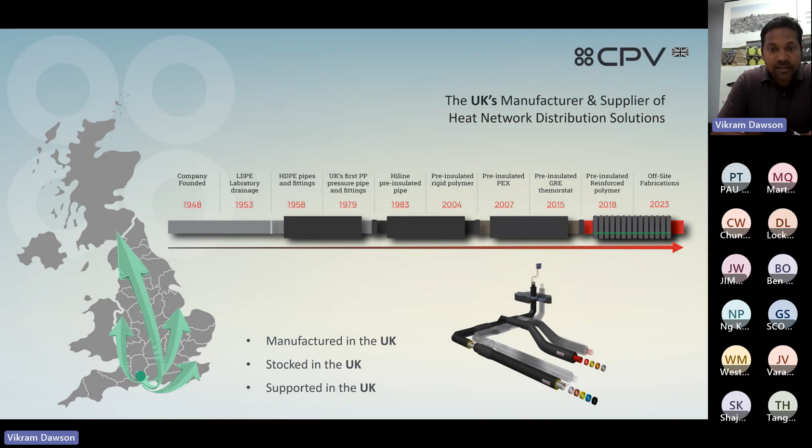So without pulling any further, I'm going to go into the heat networks and everything else. And as Josh said, any questions and answers can be either put in the chat or I can answer it at the end of the presentation.

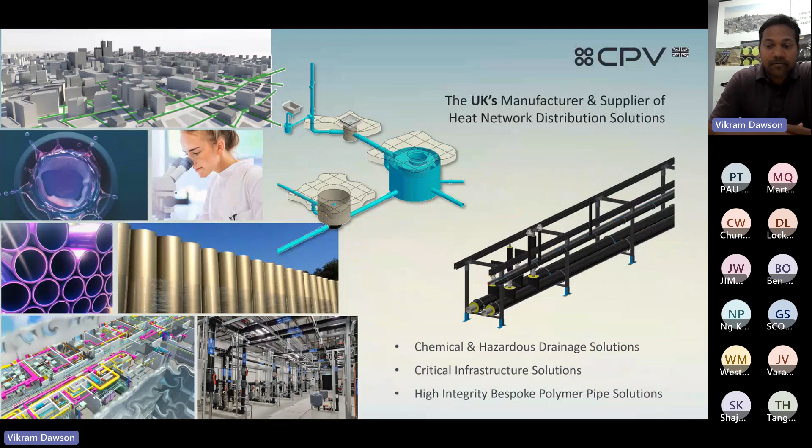As stated before, chemical and drainage applications were the main focus for CPV in the 50s, but that's moved on to critical infrastructure solutions and bespoke applications for various applications in the commercial and domestic industry. The focus of this CPD is predominantly on district heating concepts, distributions, and the design aspect, as well as the installation considerations.

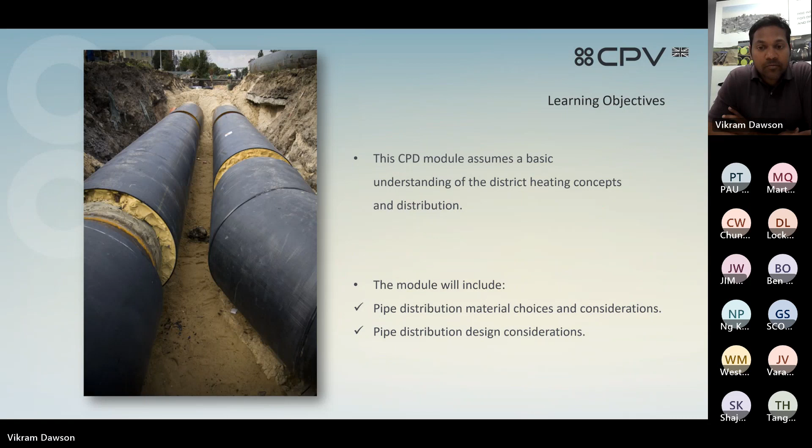So a district heating network - a lot of people on the CPD probably have knowledge or experience in this, but I'm just going to reiterate what actually constitutes these networks.

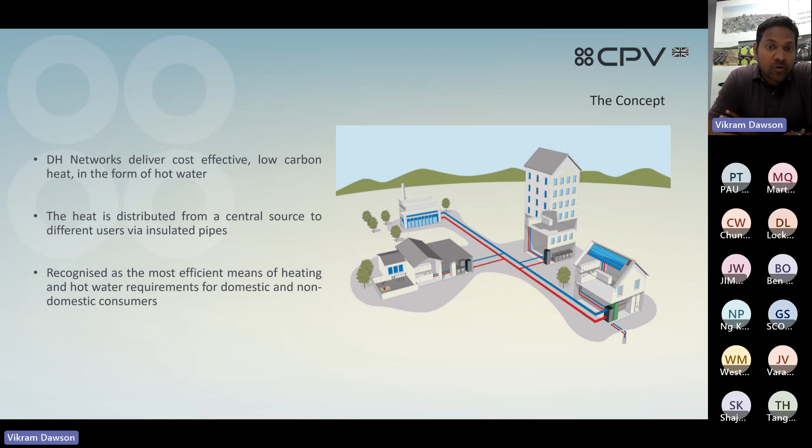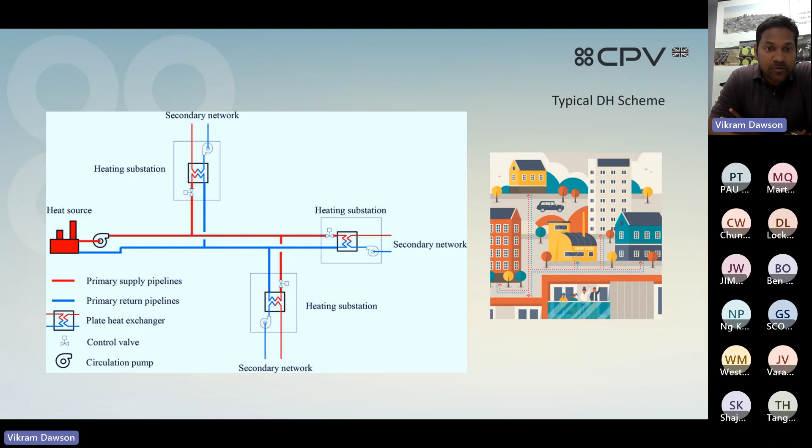So you primarily have the central energy center where the water is heated and distributed to feed either buildings, or it goes into a plate heat exchanger, which you would see. The central heat source distributes either into a secondary network or a heat distribution substation, where it can be either reheated and distributed, or it goes directly into your commercial buildings.

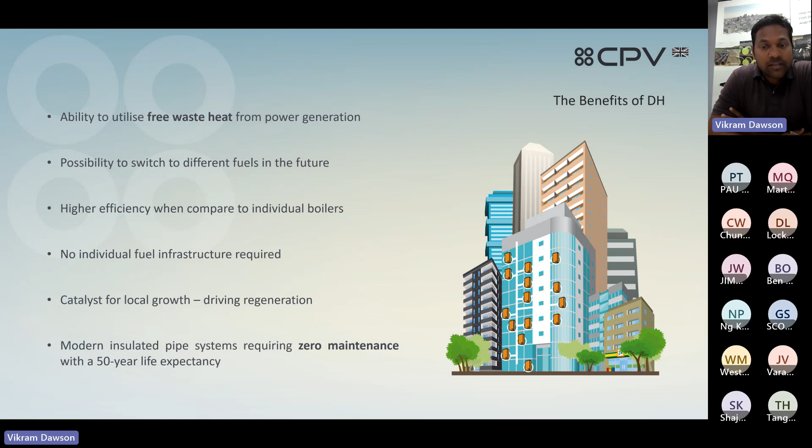The reason for these heat networks is predominantly bringing down your net carbon, as we are all focused on net zero carbon. There are a lot of waste heat recovery systems which are generated and can be used to heat the energy center. There could also be other alternatives, such as alternative fuels, and higher efficiencies using these larger heat networks. The catalyst of this entire growth is obviously driven by regeneration, with zero maintenance for a 50-year life cycle.

So what does it actually involve, and how is the water actually distributed in the network? Your primary focus is on your service pipe, your insulation, and the outer casing, where water is distributed through the service pipe, the insulation acts to reduce heat loss, and the outer casing protects the insulation as well as the service pipe. We'll look further at the other options in the market, the various insulations, the service pipe, and the outer casings in the slides to follow.

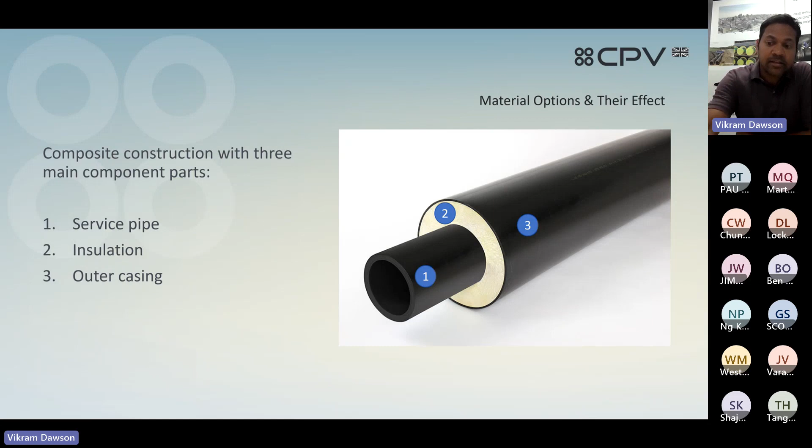To start off, major considerations need to be based on to select a system - that is, what service pipe you would select and what would actually suit your requirement would be dependent on your flow, temperatures, and pressures, your characteristics, your thermal stresses, and thereon spiraling onto the size range, the installation jointing, the maintenance, and everything else to go with that to make it a more sustainable system.

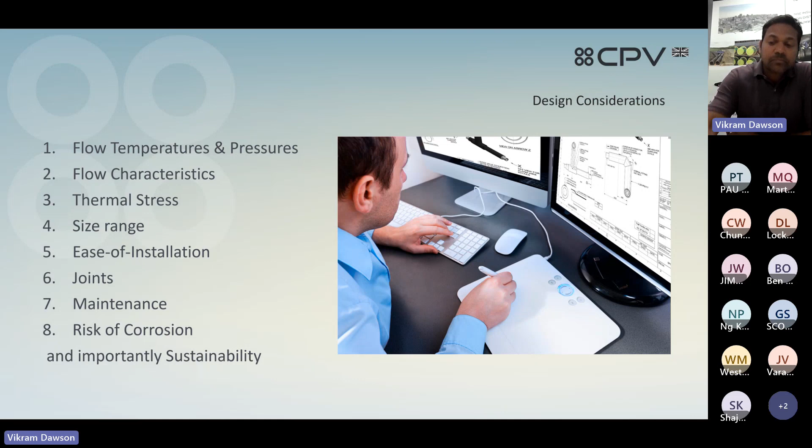Traditional systems generally have always been on the higher side of operating temperatures and pressures, and that is predominantly coming down with a lesser need to run at those temperatures and pressures. So before you start designing a system, the service pipe needs to be looked at, as well as all the necessary certifications for any materials that is a certified product to be used in the district heating market.

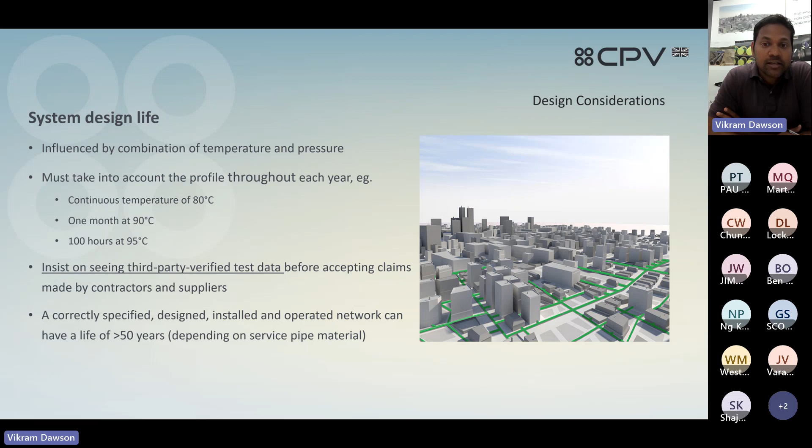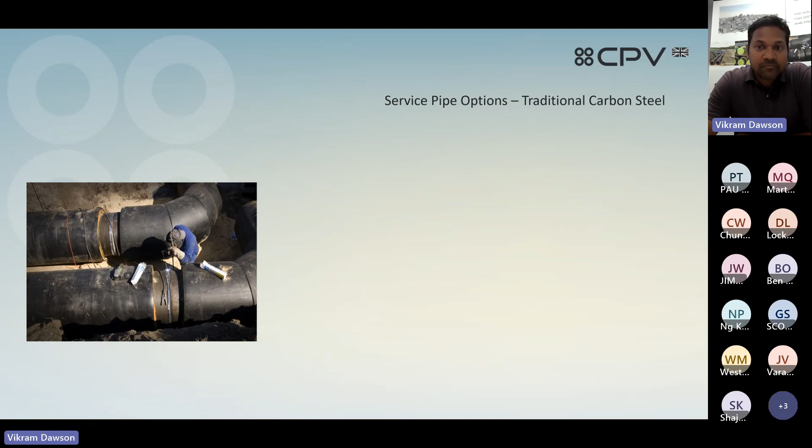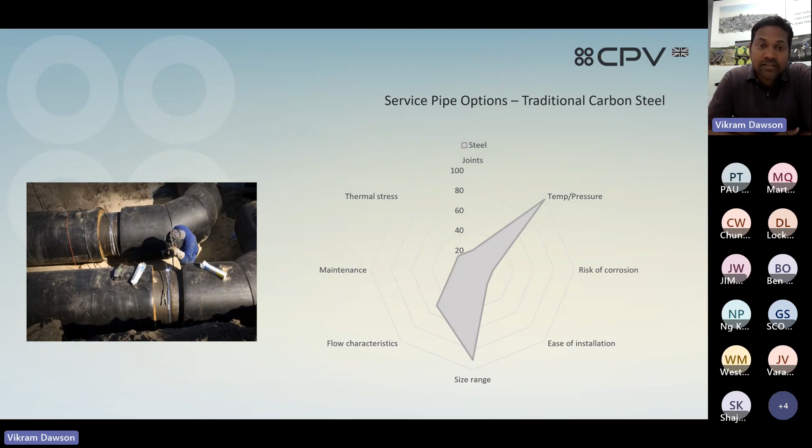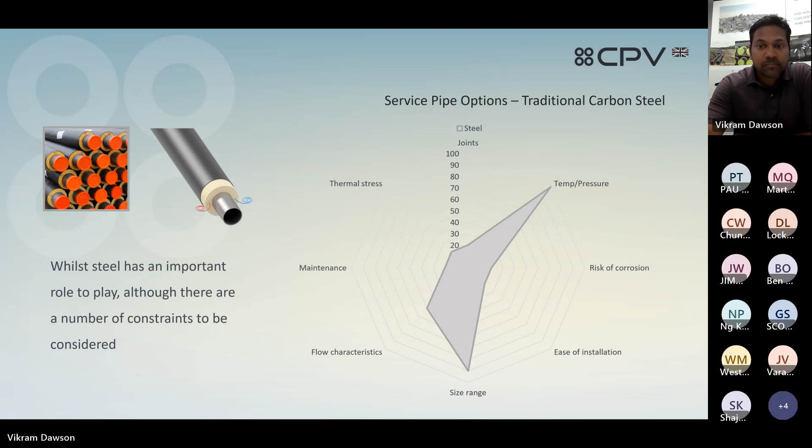So the traditional system has always worked well, but it does come with a few drawbacks when you consider other materials. These need to be taken into consideration when designing a system - selecting your material. A steel system, although it hits your temperatures and size ranges, if done properly, with all the considerations such as your thermal stresses, your joints, and the ease of installation...

...and the size range looked at properly, and the flow characteristics, you would have a really good system. But then the maintenance is also a lot, or it could be lesser, depending on how the system is installed. Steel is also prone to corrosion, so that needs to be factored in.

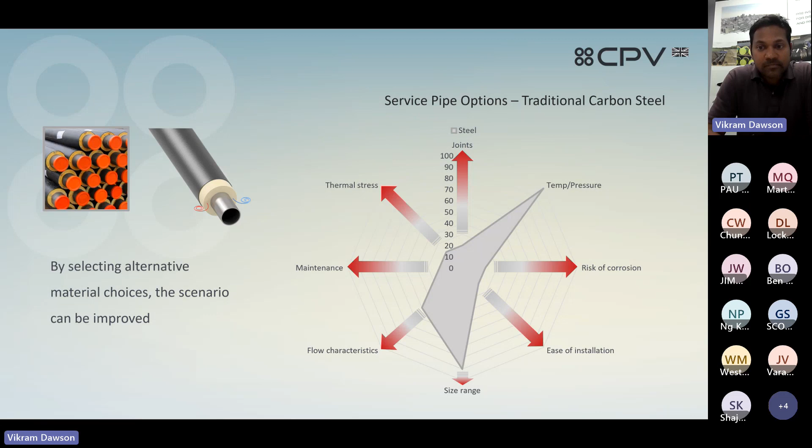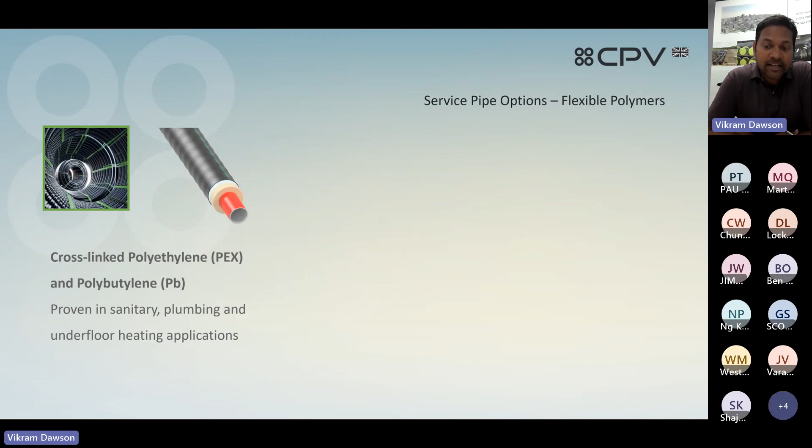And when you compare it to polymer systems, you will see the difference. There are many flexible polymer systems. PEX and polybutylene, to start off with, were used and proven in sanitary and plumbing applications for underfloor heating, and that spiraled on for use in district heating schemes, although operating under lesser temperature and pressure. Those will be on the smaller schemes, and there are a lot of advantages - obviously it cannot run at higher temperature and pressure.

So those are the constraints, which need to be considered for larger schemes. The size range it can meet is a constraint, because there will be sizes only up to 6-inch or 160 mil which polyprop or the PEX system can meet, and the polybutylene as well. The size range obviously has an impact on how big the scheme is.

The advantage with that, though, would be your thermal stresses, which are far lesser compared to a steel system where the forces are greater. You have a maintenance-free system - the corrosion issue, that's maintenance-free if the installation is done properly. Corrosion issue is not seen in plastic systems or flexible polymer systems. The flow characteristics are very good because the inner surface is very smooth.

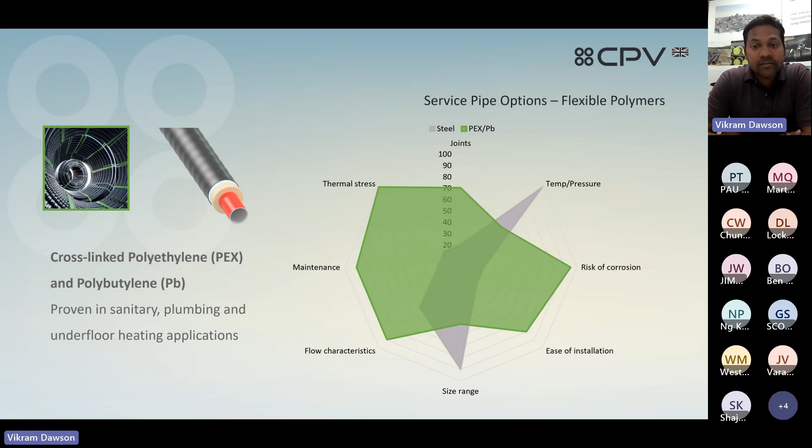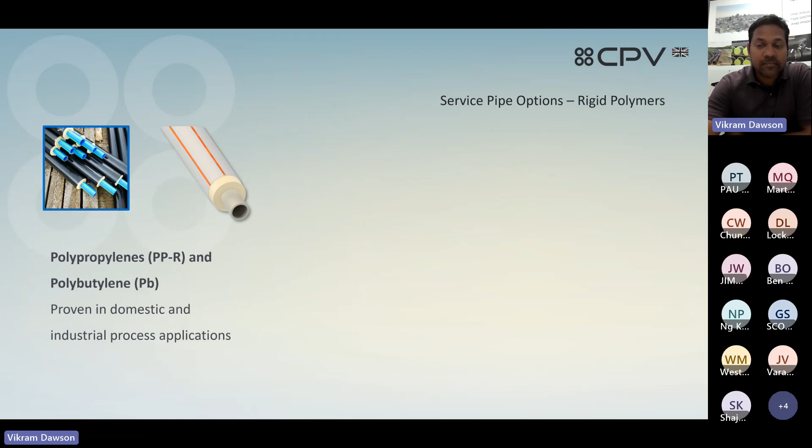That's moving on to our polyprop systems, which are rigid systems, which help with the ease of installation as well as the size range. But again, with polymers, you have a certain maximum temperature which you need to work to, which is not the same as steel systems. The rigid polymer systems, as opposed to steel, where you can see here, there's an overlay which hits all the marks - your jointing, temperature, pressure, risk of corrosion, flow characteristics, maintenance, ease of installation, size range. The rigid systems of polymers can meet all that.

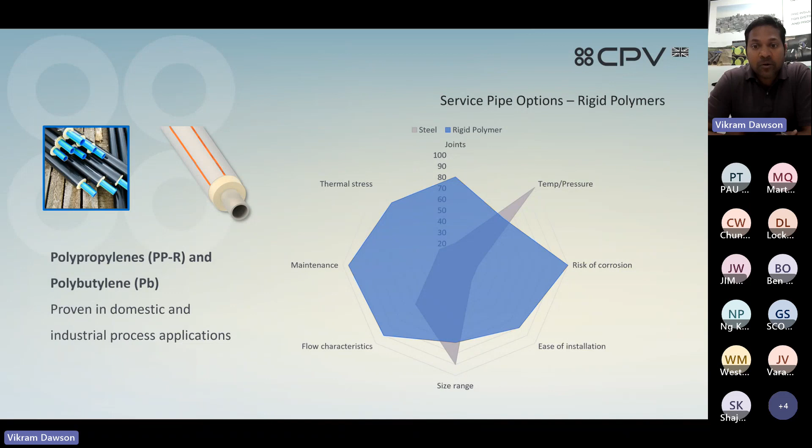And that's a typical example of a pipe in a trench with electrofusion jointing, which we're going to look at different jointing methods as well, which needs to be considered when you are working with different materials. The image there is a twin and a single system, which is transferable to traditional steel systems, as well as adopted in rigid polymer systems, as well as flexible polymer systems.

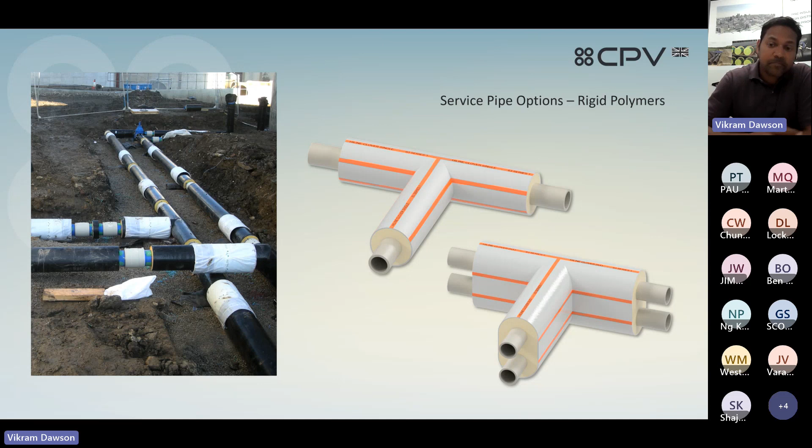GRE, we're going to touch a little on that because it's a product predominantly used in the petrochemical industry, but is also a good material selection for these district heating schemes, because they can meet the temperatures and pressures which are greater than polymer systems. Though it falls a little under steel, it predominantly hits most of the design aspects of steel, and that's a good material to select, given the money you're going to spend, or if the scheme needs it.

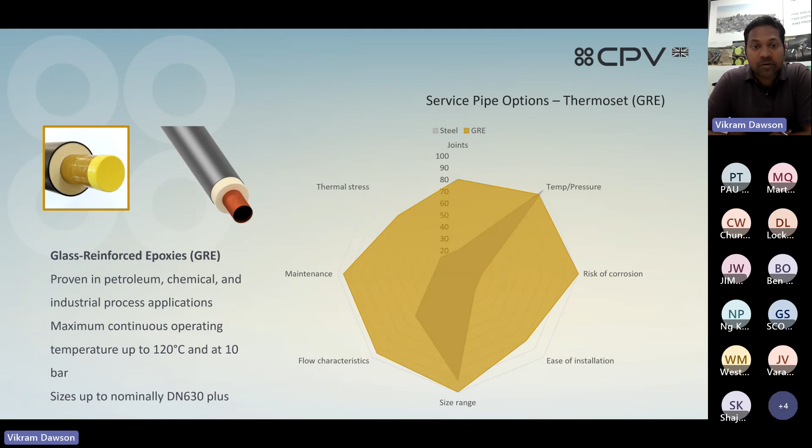So GRE is very similar. Again, we're overlaying it over a steel system, and as you can see, it hits the right marks even better than rigid polymer systems, because it can hit higher temperatures and pressures. The maintenance aspects are far lesser, with no corrosion, and the flow characteristics make it a very viable system for larger district heating schemes, as well as small ones. The jointing of GRE...

...is a little different to rigid polymer systems and steel systems. As you can see, there's a cross section of a joint where it's an adhesive joint upon a glue system, as well as a heating blanket which helps the glue to set.

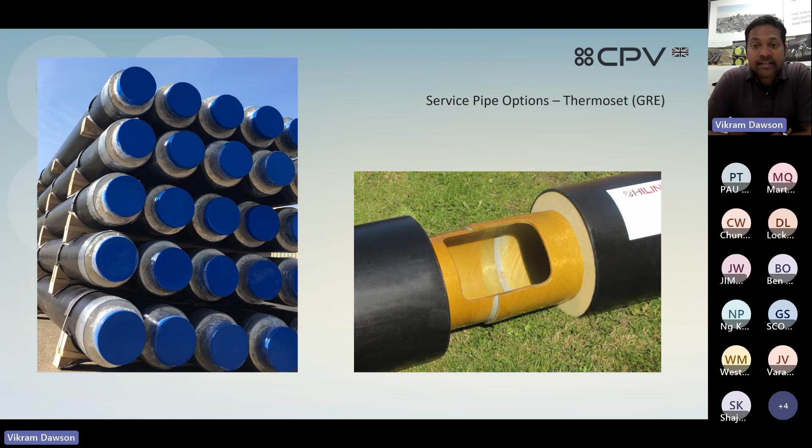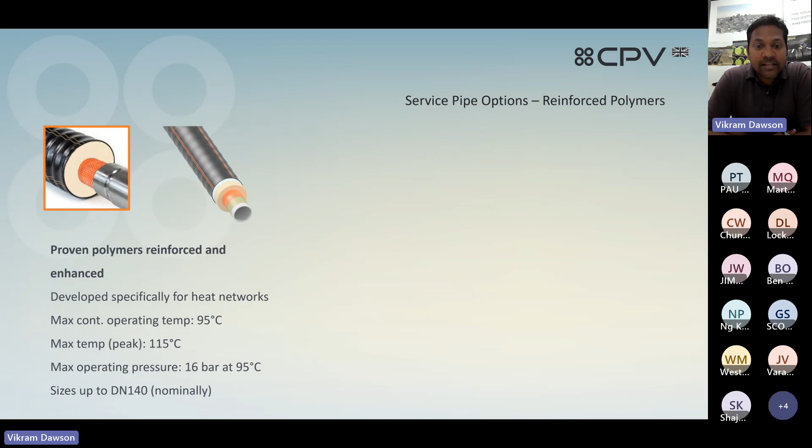Going into polymer systems, there are also options of reinforced polymer systems, which hit the higher maximum temperatures. So the flexible polymer system, which can run at a maximum operating of 80 degrees, is exceeded on these reinforced systems, where 115-degree maximum peaks and continuous 95 kind of set the bar for flexible systems, making your material selections good, with options running up to 6-inch on flexible systems, which is what you would see as the max.

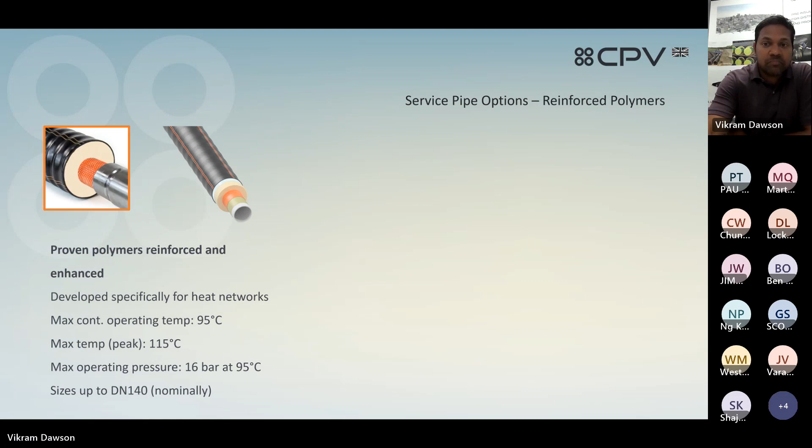And overlaying it against steel, it's far better than traditional flexible systems, which have PEX as the primary material. This is reinforced, hence it extends the size range, and it meets all the criteria of maintenance risk of corrosion characteristics, flow characteristics, and thermal considerations.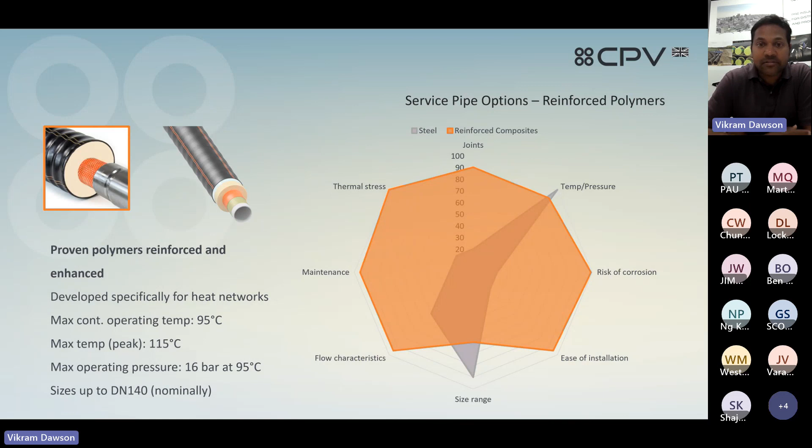The jointing is a pressed fitting. We're going to look at the fittings on a separate slide here. But as you can see, these systems, with the change in direction or the way it's laid in a trench, make it a far easier system to install on site. If a trench has a lot of services in it, these flexible systems work really well.

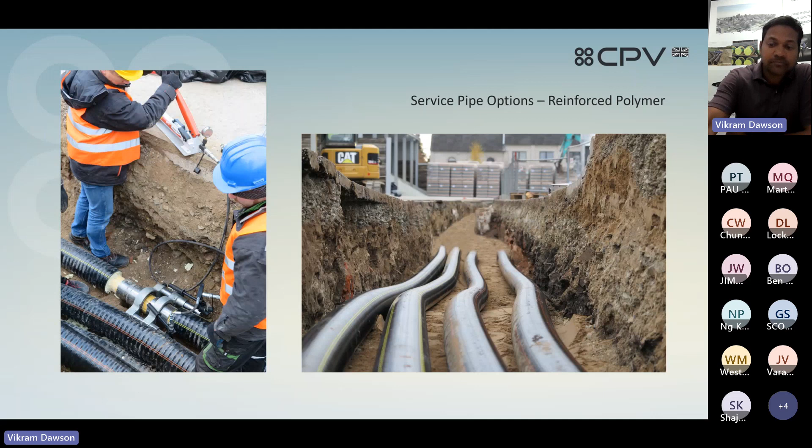Your joints. Okay, so as you can see, traditional systems, the steel system, is arc and gas welded. We've also touched base on the socket adhesive system of GRE. The polymer systems, the butt and electrofusion, are widely used above and below ground, and it's a proven jointing technology, as well as the mechanical press fit fittings used with reinforced polymer systems.

There are also mechanically bolted systems, which are seldom used, but can also be used below ground. But what you would see traditionally on rigid systems, that is polymer, would be butt and electrofusion, along with gas welding on steel. And the outer joint, there's a slide on your right, as you can see.

This is a new system where the electrofusion coupler is half welded or pre-welded and prepped prior to going to site, which makes installation on site far easier, where the need for clamps and peeling of the pipe is all taken out. And the outer joint, or the void where these joints are filled, is going to be looked at on the next slide.

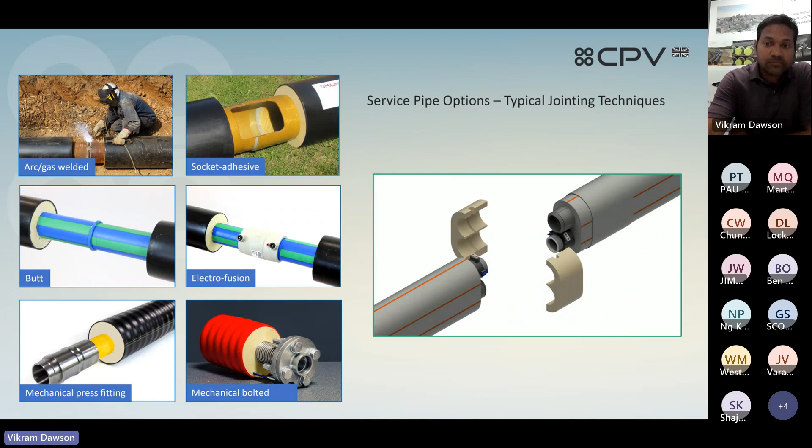So a graph or table where you can see the different jointing methodology of the various systems.

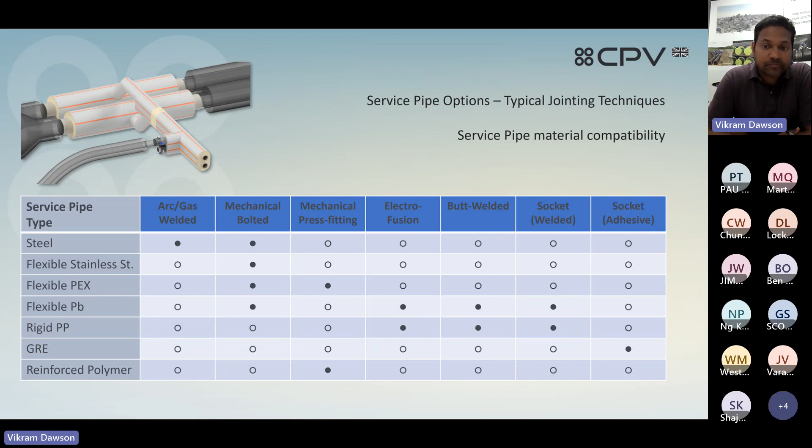So moving on, design considerations for these systems.

Bonded and non-bonded systems have a clear difference between them, which has a massive impact on heat loss, as we'll look at in a later slide. A bonded system creates a bond between the service pipe and the insulation, thereby minimizing heat loss, whereas a non-bonded system is a wraparound foam, which on the downside has a possible issue with expansion. On a bonded system, the service pipe, the foam, and the outer casing move in unison, as opposed to a non-bonded system.

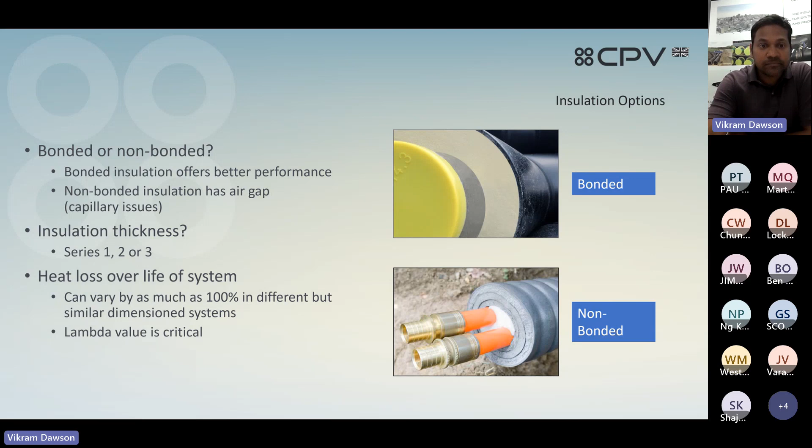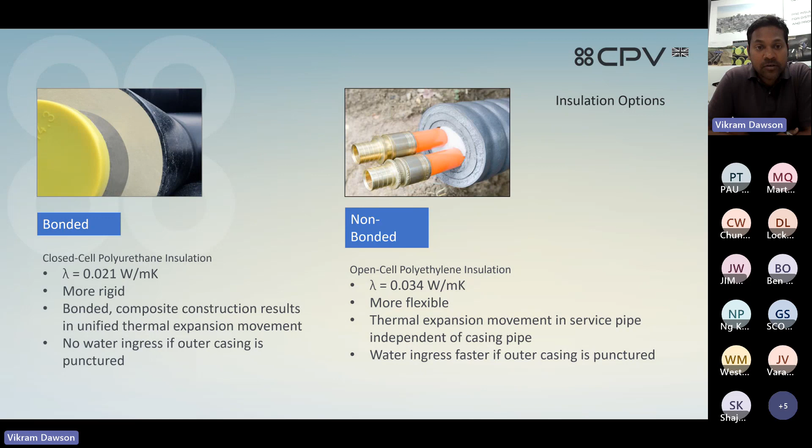The lambda value shown here, which impacts heat losses, is critical to both non-bonded and bonded systems. As you can see, the lambda value is far greater on a non-bonded system, making it either require multiple layers of insulation to meet requirements, making the trench bigger, as well as increasing cost. A bonded system has the massive benefit of no water ingress should the outer joint not be properly installed and a leak happens.

Here's a typical graph showing the heat loss between a bonded and a non-bonded system, a visible indication of why a bonded system needs to be used or selected.

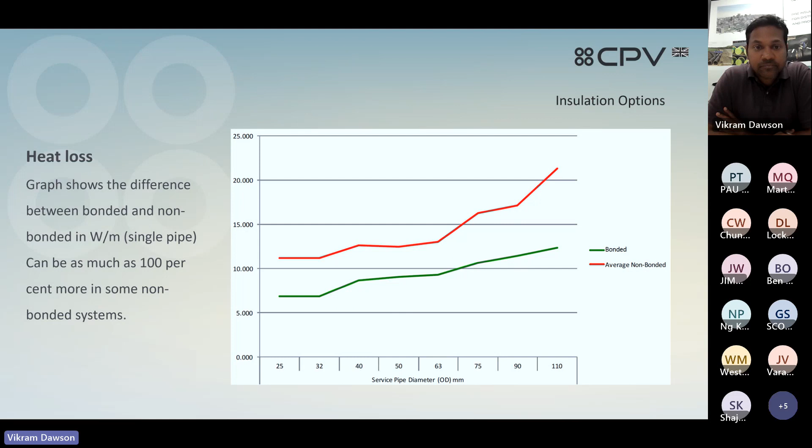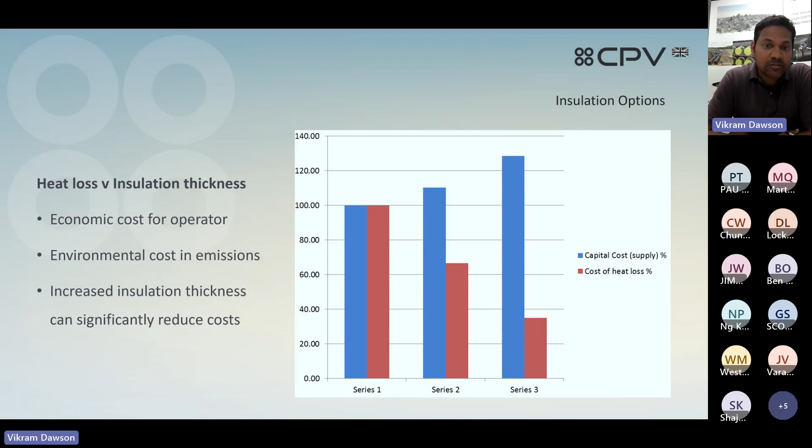There are different insulation thicknesses which impact your selection at the design stage, where cost is a massive factor, but over a period of time having greater insulation has a greater benefit. Series 1 is a traditional system with minimum insulation between the outer casing and the service pipe, which can be enhanced in Series 2 and 3. Greater insulation gives a lesser heat loss, making the system more cost effective over time and significantly decreasing the overall cost to the end user.

Aging from foam is something that has an impact on the system itself. Foam that ages decreases in performance, and there are multiple barriers which can be used to lessen or decrease the aging of the foam. This also needs to be considered, either having a thicker outer casing should a leak happen, or a barrier within the casing to decrease or prevent any leaks or gases escaping the system.

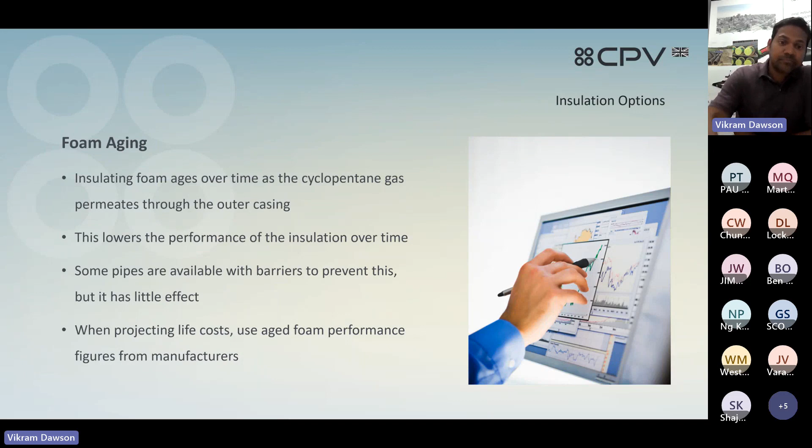Traditional systems have predominantly had, because of the issue with corrosion and leaks of the service pipe weld or any leaks in the system, a copper and tin wire or surveillance system which is compulsory on steel systems. This is not seen in polymer systems because the issue of corrosion or leaks is far lesser, but a leak detection system can also be incorporated or implemented in the system should a need arise.

These systems can either be used with leak detection systems or with a leak detection and a maintained trace heating system should a need arise. All it does is allow you to pinpoint a leak, or detect a leak, similar to any surveillance system used on steel, which can also be done on a plastic system.

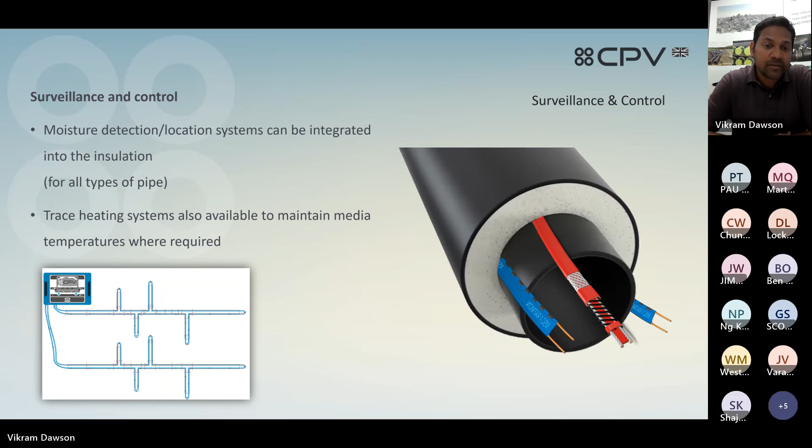This leak can be pinpointed to a close range of about 1 meter within the leak. We are not going to be looking into surveillance systems in depth, but just to give you an insight into what you need to consider should you be using a rigid or flexible polymer system, as opposed to a traditional system where a surveillance system is a must.

The outer casing of buried systems has always been either low density polyethylene or high density polyethylene. HDPE is used in traditional steel systems as well as polymer systems, and LDPE is used in flexible systems. There are also alternative materials in the market where you can use aluminium as the outer casing, steel casing, or a barrier for contaminated ground, or a thicker casing, spirally wound galvanized steel for above ground, as well as touching base on high modulus polymer systems, which is the next generation with a massive advantage in alternative materials that can be used.

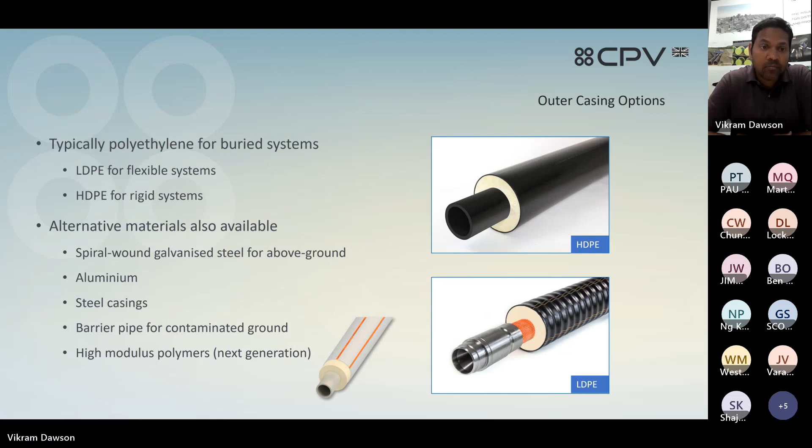The outer joint, which we spoke about a little earlier, the traditional systems would have been the heat shrinkable double seal joint, where it's a joint which is slid on prior to the service pipe connection being done, and then is slid back on and shrunk down, and either a two-part foam liquid or a half shell is used. The heat shrink joint has a mastic which creates the bond between the service pipe and the inner of the outer joint.

But you also have the clip-on systems where it can be retrofitted, where you would slide in a rubber ring prior to doing the service pipe connection, and a clip joint, that is the mechanical shown in the image, is a two-part clip which clicks together and foam is poured into the void. As you can see, it is far bulkier, making the trench possibly a little bigger.

So another design consideration: fusion joints are far more robust and are used extensively for below ground systems, as well as for contaminated ground. It's a good consideration to use these. There are slide-on electrofusion joints, and there are also the wrap around, which can be retrofitted, which helps with the process of when commissioning a system. These can be retrofitted, which is a massive advantage.

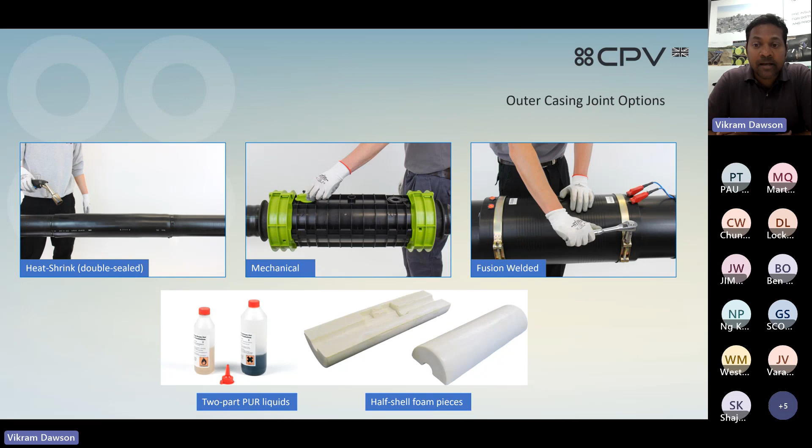So, operating temperature and pressures - this is something which dictates your design considerations. For larger heat networks, it's still steel running at higher temperatures, but as you can see, the GRE and the reinforced polymers sit right in between them, which are more so being used or being considered by designers for systems which are running at temperatures between 110 and 120 degrees. And smaller schemes, the PEX and the PB are used.

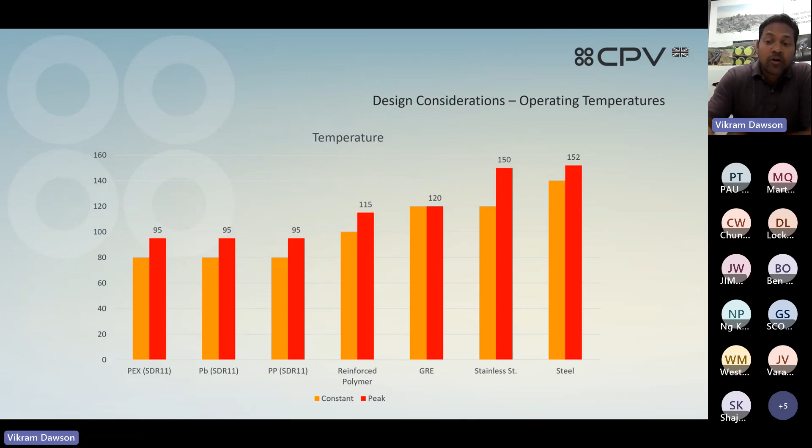And going on to that, into our next slide, which is the pressure considerations. Obviously, steel can run up to 25 bar, and all other systems are running at a maximum of anything ranging between 6 and 15 to 16 bar. So if you're looking at high pressure systems, steel is your go-to material.

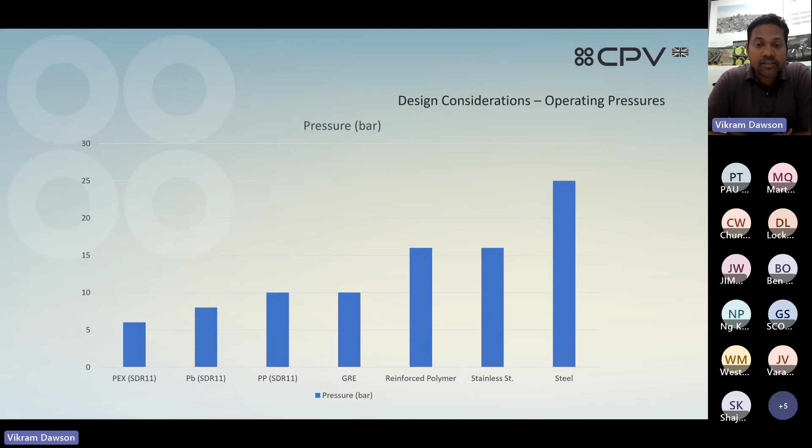But this can also have your issue with the surface roughness, where you need to consider your corrosion or your surface roughness between polymers and steel, where there's a massive advantage of using these polymer systems, where your flow rates and your flow characteristics will be maintained through the life cycle of the job or the project, rather than steel having a 37.5 decrease or increase in surface roughness.

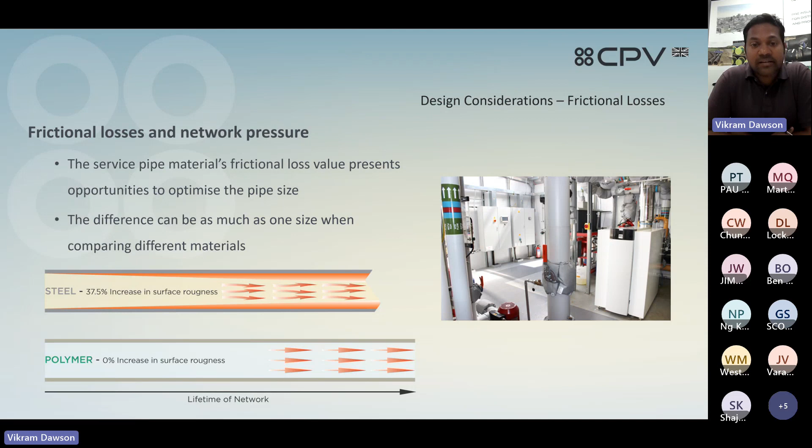Stress analysis, a major consideration for traditional systems which have always impacted large schemes, where the cost is driven up due to having expansion bellows, change in directions, or any other compensators to be used, to compensate for any thermal stresses where traditional systems tend to have an impact.

This is not obviously relevant to polymer systems, which take out that massive cost, as well as the need for any expansion considerations for polymer systems.

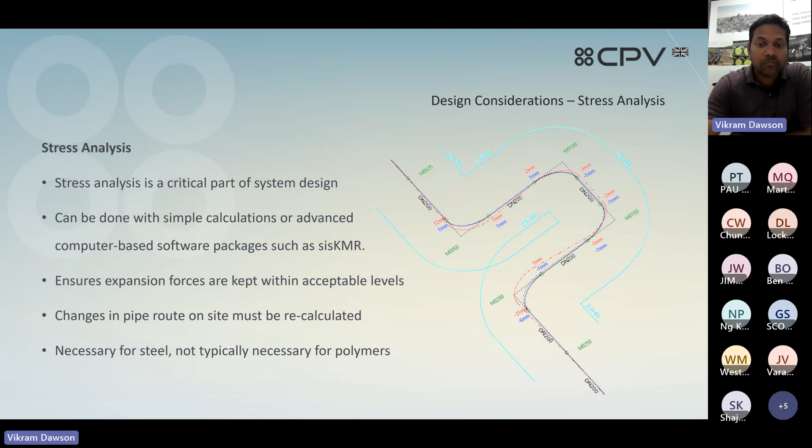Moving on to hybrid systems, which is seen more frequently in the last 5 to 10 years, where steel and polymer systems are used in tandem. So for large schemes, this is a way out where you can use steel for your ring mains from the energy center, and polymer systems, depending on your temperatures and pressures feeding the different substations or your buildings, can be used, which when overlaid, your wholesome experience of using a hybrid system would be your answer, depending on what you want to achieve or what the client's requirement is.

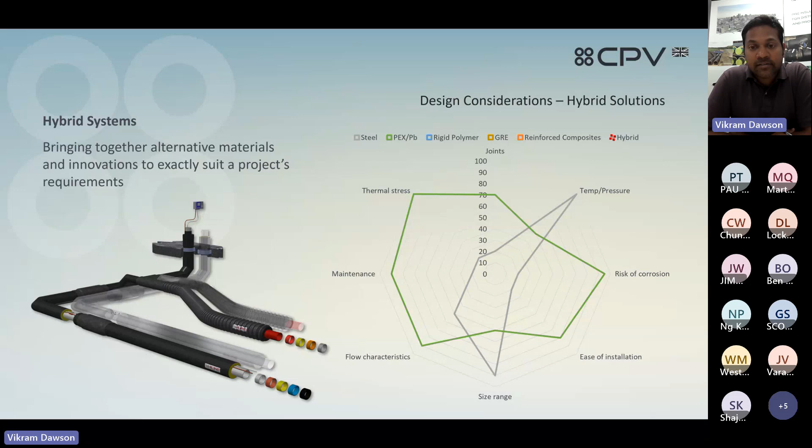A hybrid system gives lesser maintenance, better flow characteristics, as well as the risk of corrosion and your thermal stresses have been looked at or reduced largely using hybrid systems, especially on the spines or the branches coming off going into your buildings by using polymer or GRE material.

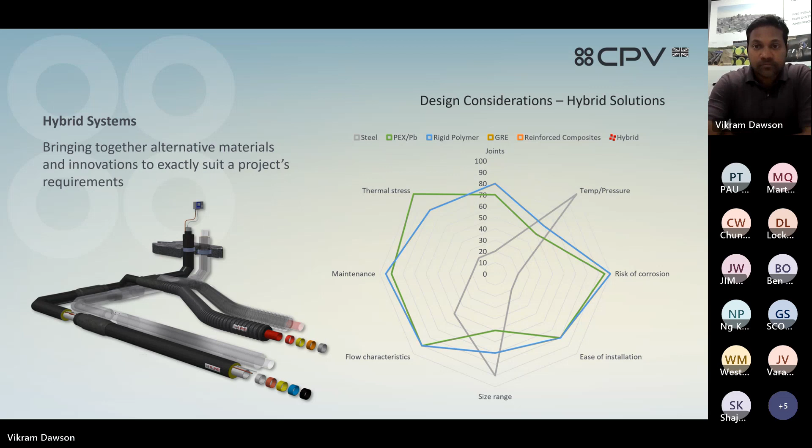And as you can see there, the rigid polymer systems have a great effect on hybrid solutions. And your GRE has a good impact on it, as well as your hybrid systems, as you can see, gives you the overall requirement for a client or your network.

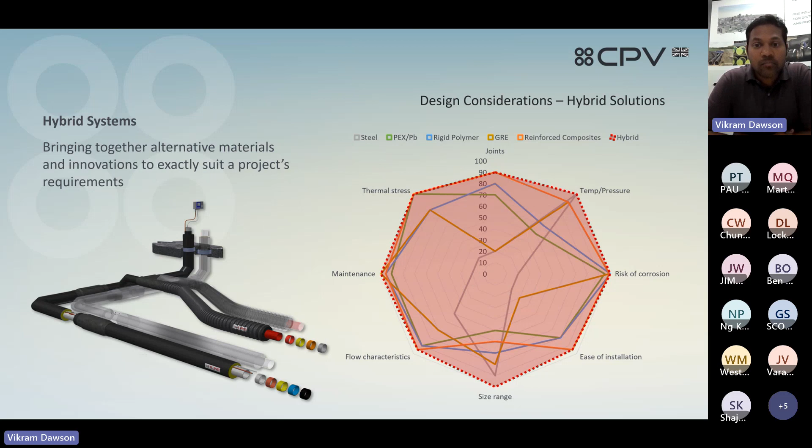So the hybrid solution is what most people would be tending to lean to in the future. So what it does is it saves time, it obviously improves your quality, reduces your risk or waste, and lowers the cost considerably.

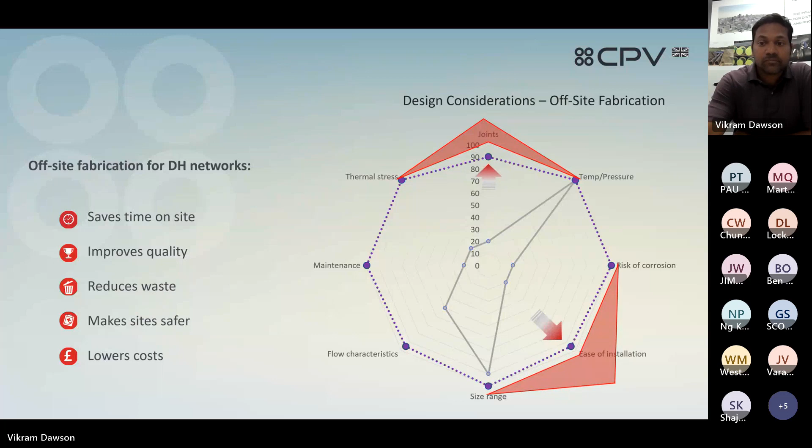Off-site fabrication is something being used more commonly, where the need for reduction of site time and ease of installation has pushed the industry towards off-site fabrication. The main materials are installed as required, either during the project or before, and if design considerations are taken into account, off-site fabrication reduces the risk and reduces your cost massively.

This can be achieved by BIM modeling, which is used by designers as well as a client requirement on most large-scale projects. If you have any unforeseen requirements on site, off-site fabrication would be a go-to, because often the requirement of a joint cannot be met on site. Pre-insulating a system off-site and then dropping it into place, as long as your coordinates are met and the BIM modeling is done correctly, saves a lot of time and hassle on site.

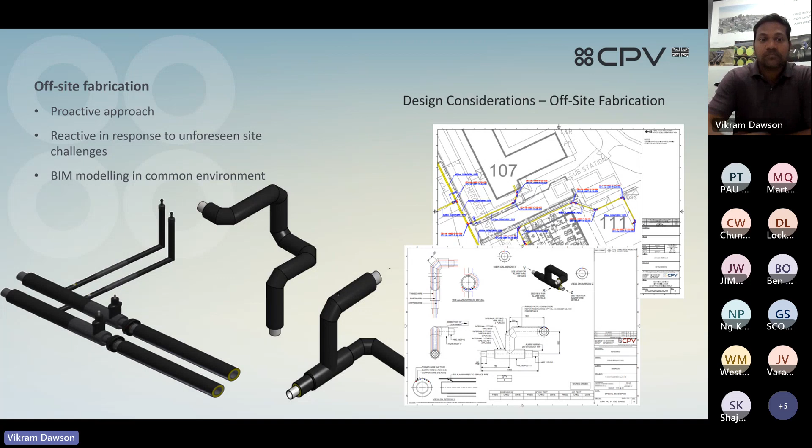Here's an example of off-site fabrication of a plant room for a data center. As you can see, the need for the number of joints is greatly reduced on that steel spool right in the middle. That saved at least 6 welds and 6 outer joints by doing the off-site fabrication. That's a possible design consideration, should all the necessary data be available at the time and a fully coordinated model be achievable.

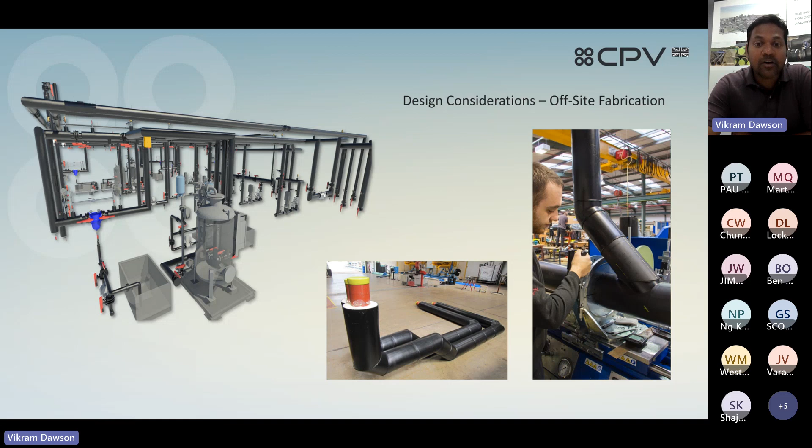We're all driving towards net zero carbon, and hence the 4th and 5th generation polymer systems are what everyone's focus is or needs to be on, reducing the temperatures and pressures and the need for having larger systems using polymer.

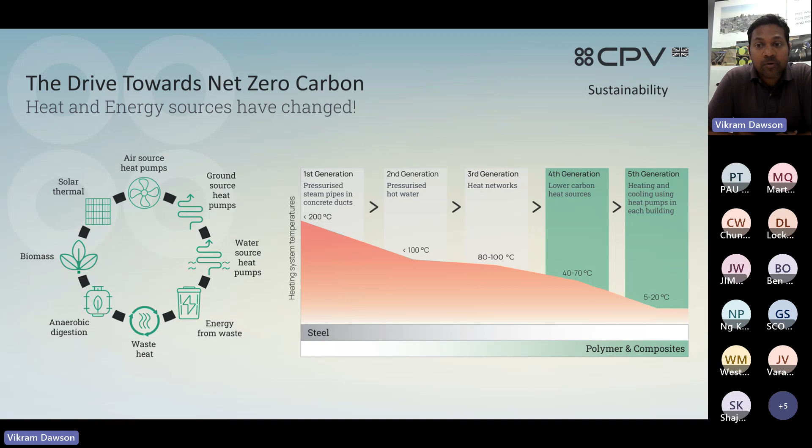That brings us to our drive for net zero carbon, which would have your hybrid system, which is more sustainable, has higher environmental credentials, high performance, lesser risk, and ease of installation on site, overall reducing the cost.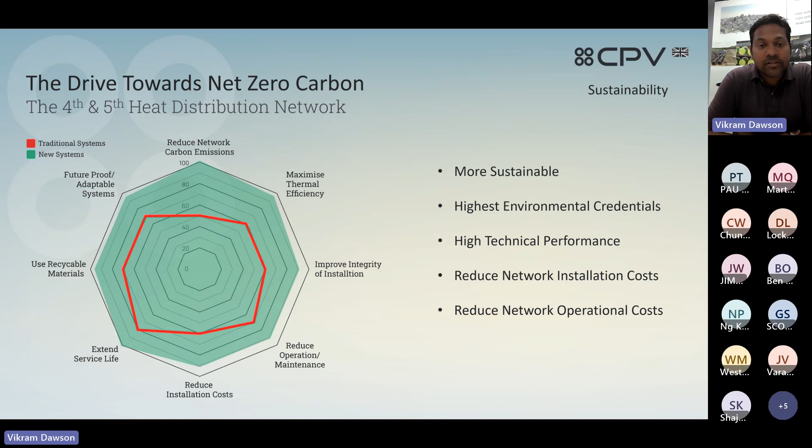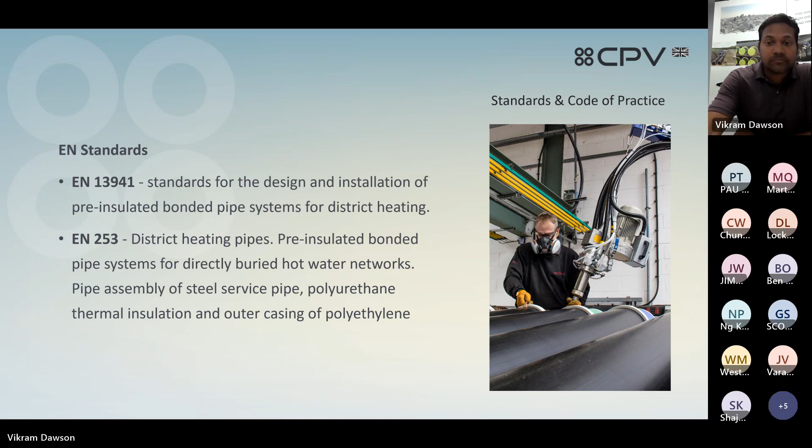Certain standards which you need to be aware of when specifying materials are your design and installation standards EN 13480 and 13941, and EN 253 for district heating. The code of practice, which is the CIBSE standard for heat networks, gives a clear measurable output for an effective network.

I'm sure most people already have access to this. It can also be sourced from the website, and this needs to be considered during design and used when designing a system as well as any network.

There should always be adequate supervision, experienced installers, and training needed for inner and outer jointing, your stress analysis, and testing of the system, depending on whether you have a traditional system where NDT is required or a standard system where a hydraulic pressure test is required. That all needs to be considered during installation as well as specified in the documents.

And as we're moving towards BIM, a good documentation process and meeting BIM requirements is a need for installers.

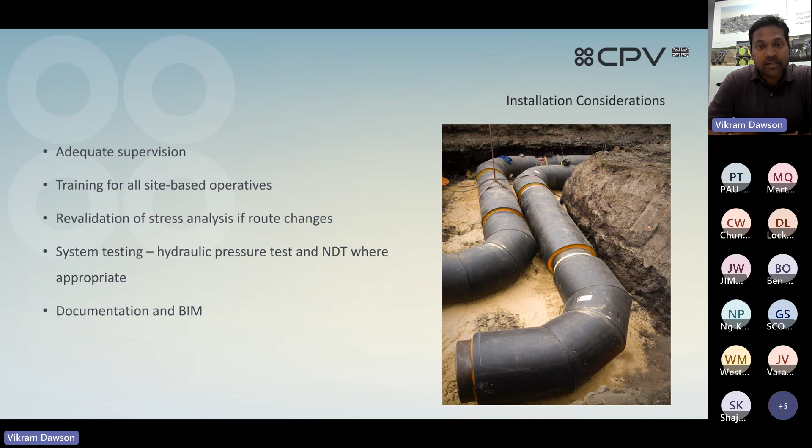So where we stand now is we're looking at corrosion-free systems. It's just a note from one of the attendees noting that the CP1 has been updated slightly.

Okay, fine, no problem at all. Thank you for bringing that up. So is that CP1 going to CP2, or? Yeah, it's just the version of it. Is it 2000? 202, but it might be the 2022 or 2023 version, I think. Okay, made a note on that, we need to update that.

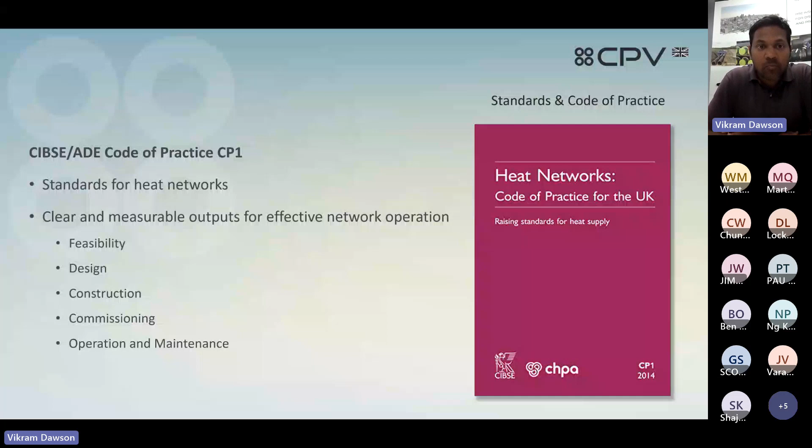So what we should all be aiming at is a 25-year design life with a corrosion-free system, where the solution would be a hybrid for large schemes, using GRE with stainless steel or FibreFlex Pro, depending on your temperature and pressure, resulting in a corrosion-free upgrade utilizing the pros and cons of the materials discussed in this CPD.

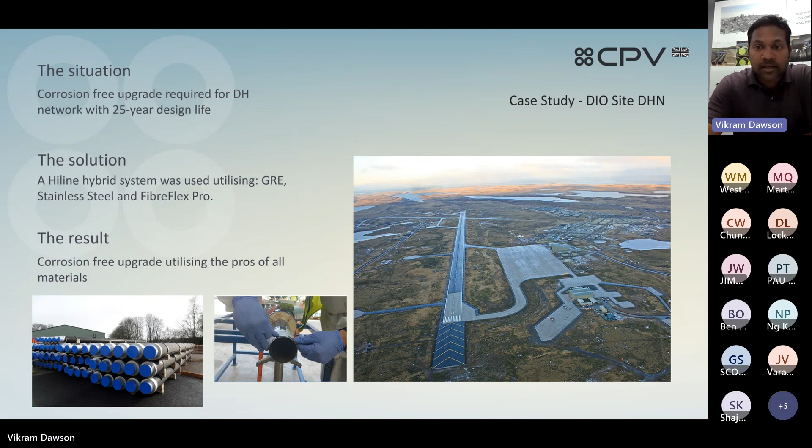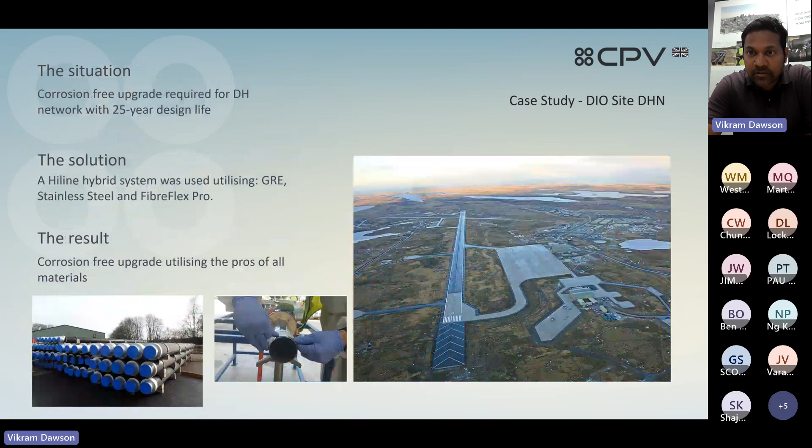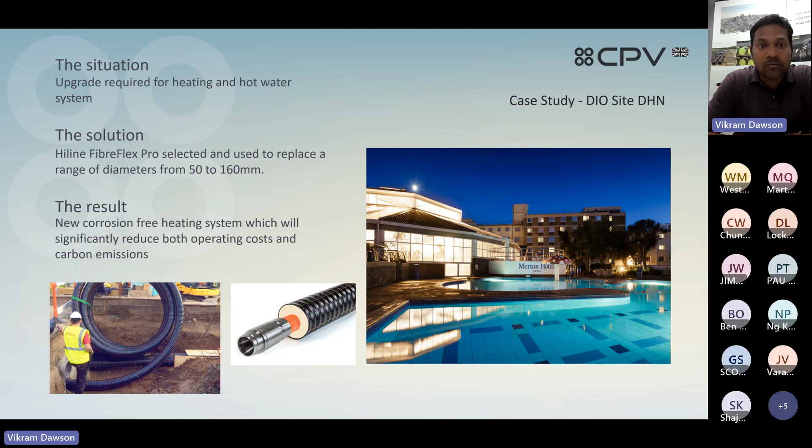So a few case studies which I'm going to go into for district heating networks. That's a DIO site - I can't actually tell you the project itself, but I've just mentioned the site there, and a few others where polymer systems have been used at various sizes. There's always a need to improve and innovate, so that we're at a point where hybrid systems are the next go-to, or already being looked at.

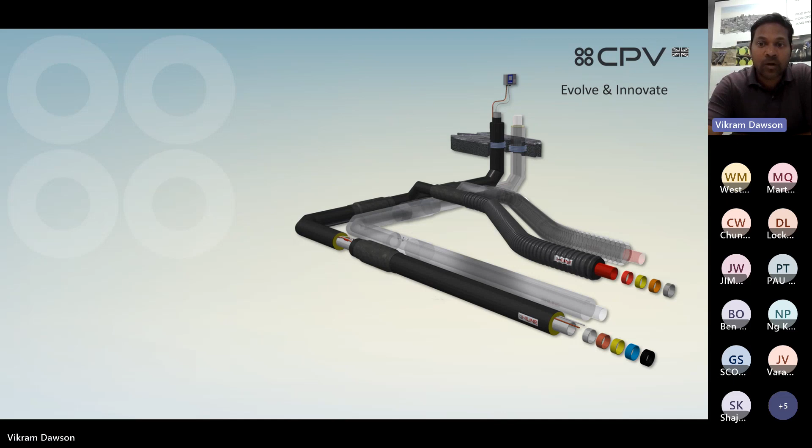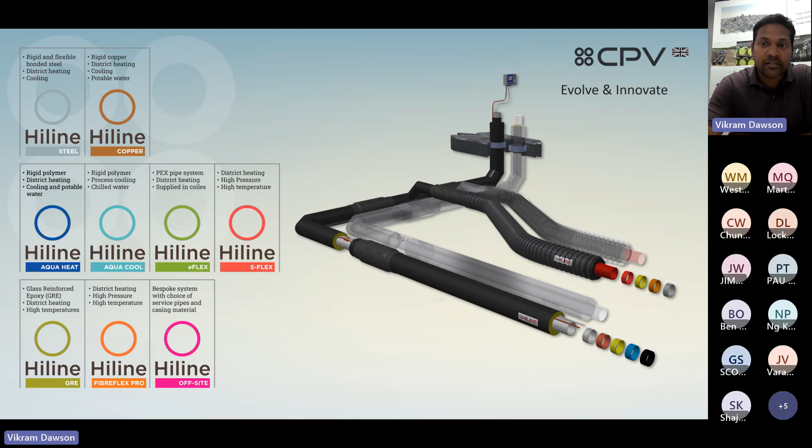It's something designers need to be aware of and consider when designing networks - the traditional systems such as steel and copper, which are still massive players in the market, and the different polymer systems on offer, and the flexible systems as well with off-site fabrication, which fits in with traditional steel systems as well as polymer systems, aiding a very cost-effective and good hybrid system.

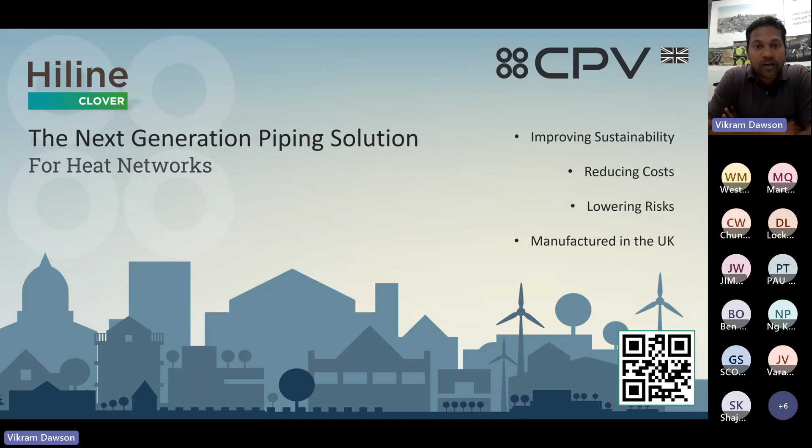So that is where we stand, and I would thank you for your time, and if you have any questions, you can fire them now.